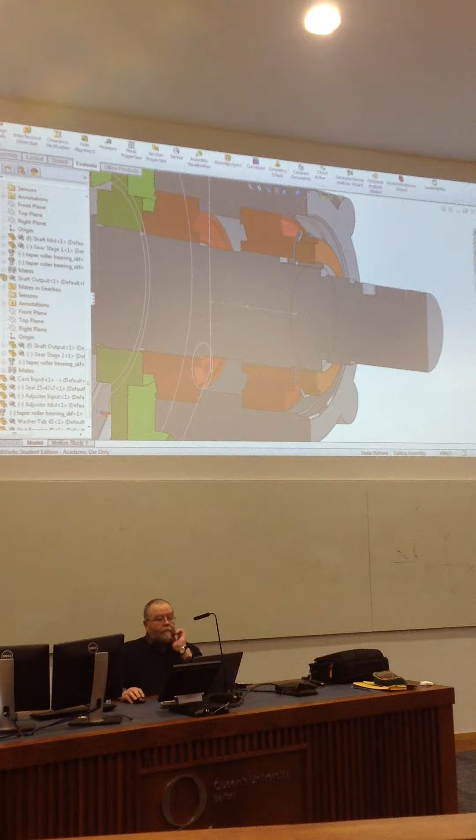This is where we left the model last week, and what I was going to do next was turn the mouse on. Right, at the moment on our shaft we have a slot cut here for the tab washer, and then we have a couple of diameters here and then a slot for the keyway.

And we need to seal this area, so we need the shaft to be able to rotate but still be sealed. Now the trouble with the slot is that it reduces the diameter available that you can use to seal on. So you don't get a very adequate shoulder to butt the drive hub up against. So the way we can overcome that problem is to put a collar on the shaft, which we seal to the shaft and provides a bigger diameter and can butt up against the end of the thread. So you get back that sort of reduced diameter caused by the keyway.

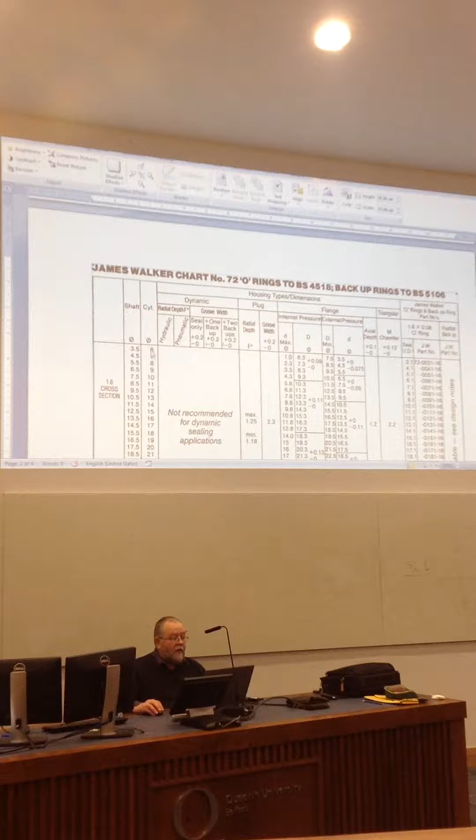So that's basically it. So what we have to do is we had our diameter for the lock nut, and we have our diameter for the shaft where the keyway is. You get all of that from your design calculations. The diameter here in between needs to be slightly bigger than this and needs to be suitable for an O-ring to go up against. So if I open up, this is a table of O-ring sizes, and our situation is that we're going to put the O-ring onto the outside diameter of a shaft. So we just look down here for a suitable size.

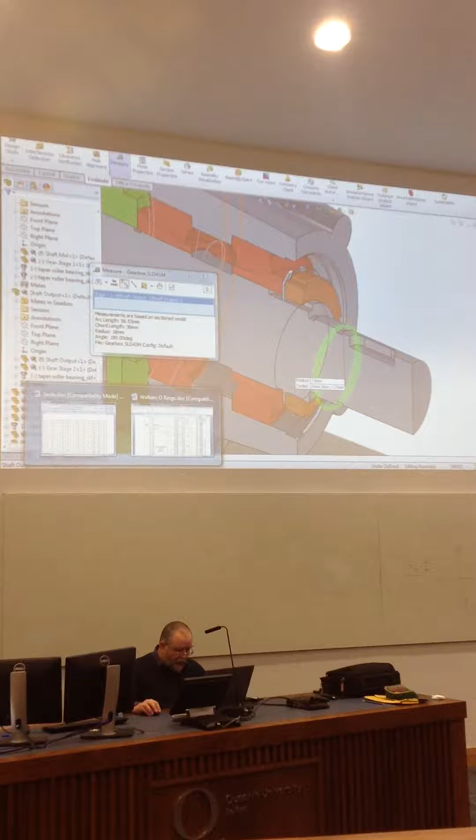Let's see, what is it at the moment? If I measure that, take that diameter there. So the diameter there is 36. So if you use a 2.4 cross-section O-ring, this is in the tables in your notes, it's on page 6.14. So 2.4 cross-section, and we're looking for a diameter of around 35, 36. Well, there happens to be one at 36, so that's fine, we'll use that. If you can't get one that suits you exactly, don't worry too much. They are elastomeric at the end of the day, so you can stretch them slightly. If possible, use a standard size, but if not, you just have to stretch it a tiny bit, that's okay.

So we're going to put a collar on the shaft, and we need to put a slot inside the collar for the O-ring to fit, and the dimensions for that are given here. It has a width of 3.1 millimeters and a radial depth of between 1.97 and 1.84. So let's have a look. I think I've got a model here open already of a collar. So there you go, it's just a simple rectangular shape. The internal diameter is 36, and then I have my groove in the middle, 3.1 wide by 1.9 radial depth. And you need some material around it to form the outside diameter of the collar.

And what you have to do is choose a size that will match a typical radial lip seal, like we did the other week. We created a radial lip seal. So if I have a look in the tables there, I've got it as 50 at the moment, and I think 50 is probably quite a good size. You want a sensible amount of thickness without it being mad. So here was our table for seal sizes. This is lip seal sizes. That's on page 8.10. And I have a choice of 45 or 50, basically, or 55. Well, I think 50 looked okay. And I'm going to have to choose a seal to go onto a 50 diameter. So we'll make that, say, this one in the middle, 72 by 8. So that will be my seal.

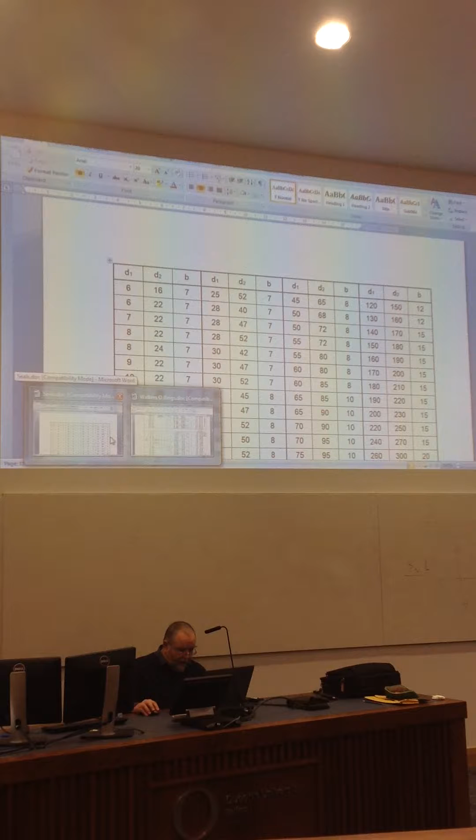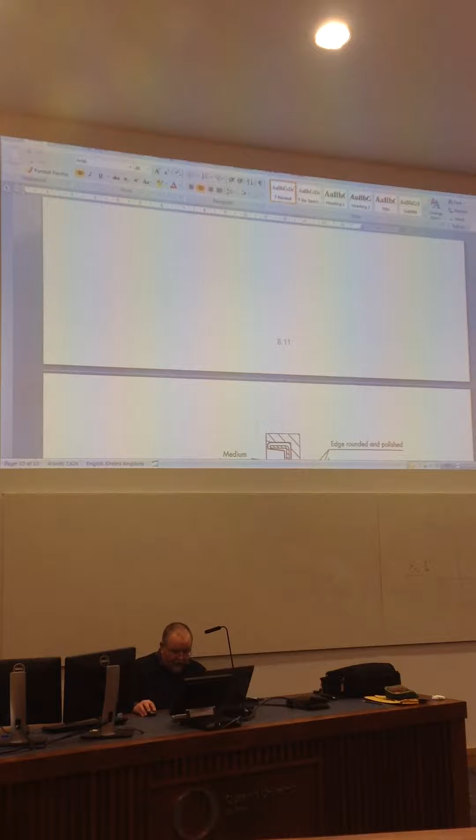And then we add on the chamfers on the two ends, and you get the dimensions for the chamfers again from the tables here. So there was the basic seal sizes, and these are the dimensions on page, what would that be, 11, give the dimensions for the lead on for the seal. So you'll see here that for a 50 diameter it says minus 3.5 to give this diameter, so that's a radial depth of 1.75 and an angle of between 15 and 30, so we'll say that it's 20.

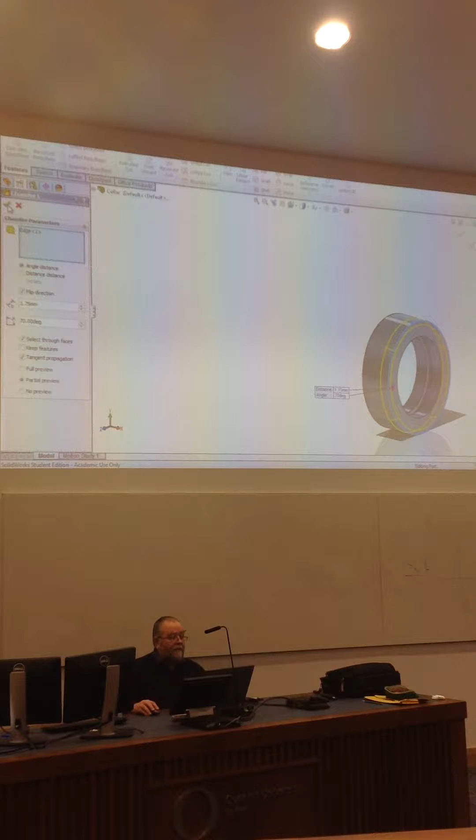So if I have a look at the model here, the chamfer details, if I do look at that, it's got a 1.75 radial depth, and you have to put in the complementary angle in this instance, so it's 70 rather than 20, and that produces one chamfer, and then of course you have to do the other one, like so, and you can also put a little small chamfer on those corners in there, and finally you can round these corners as it suggests that you do in the notes. So that's the collar.

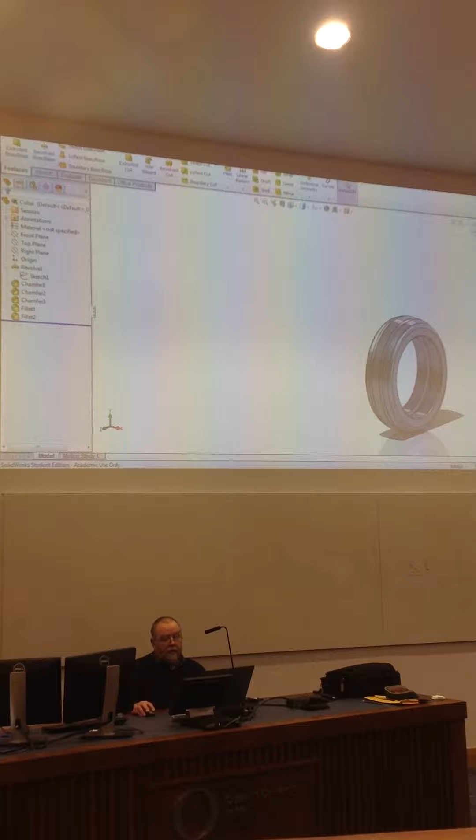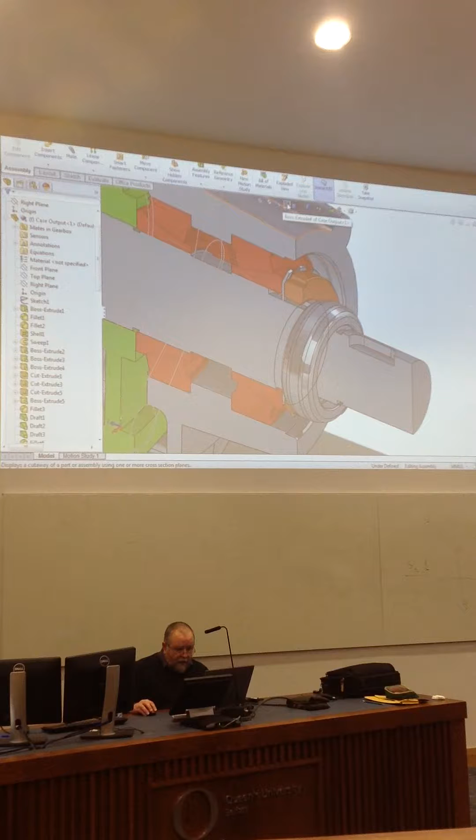Right, let's put that on the shaft. So we'll do assembly, insert component, browse, and I'll call it collar. Just dump it over there, and we'll have to turn on and off the section. And to get that mated, what we'll do is we'll just do the end face here up against the shoulder on the shaft. So that's got that one. And then the internal diameter here with this diameter here. Okay? And if I turn on and off my section now, we'll get that sectioned as well.

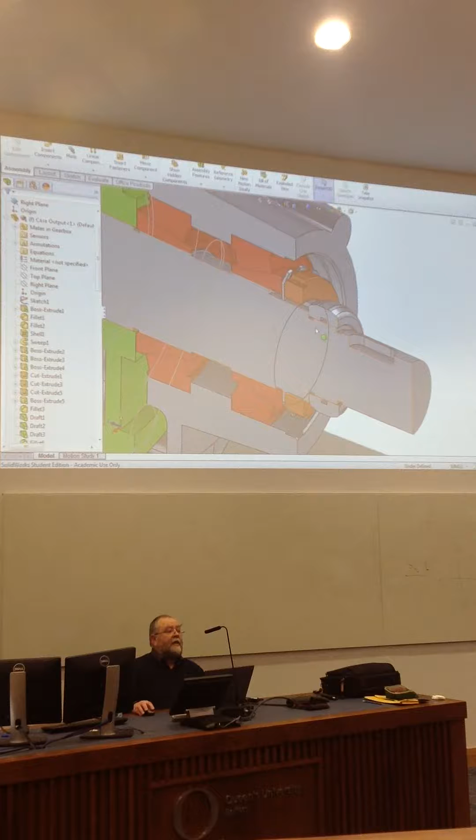Now, you'll see here there's a space for the O-ring, and we'll do that probably next week, the O-ring. I want to get the main things done today. Also on the shaft, you should have a little lead on the shaft so that the O-ring doesn't get nicked when you assemble it. Okay? But basically that's what I want to do.

So the problem I have now is that I need my seal to run on the outside diameter of this collar, and there isn't anything here that I can put the seal into. So what we're going to have to do is create a housing to carry the seal, and I'm going to start that off today. I don't know if I'll finish it. What I'm going to do to line it up is I'm going to use this diameter here, so we'll just check to make sure we know what size that is. So evaluate, measure, and that diameter there, and that's 82 diameter. Okay? So we'll create a seal housing.

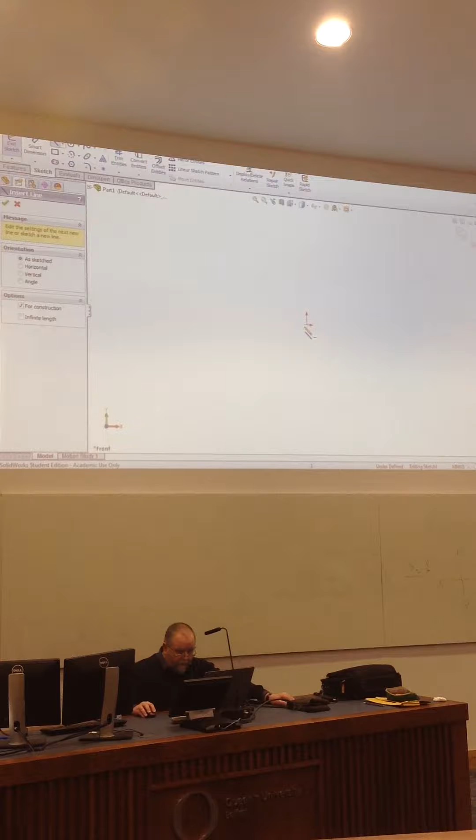And so new part. I think this is shown in your sketches, but well, we'll have a go anyway. So sketch, front plane, we'll put on an axis to start with. And then we'll start to draw in a basic shape. So I have no idea what I'm doing here, by the way, but we'll have a go at it anyway. So actually, I am lying. I do have an idea what I'm doing, but I'm just going to generate a shape that is going to look a bit random to start with. It is essentially going to have the components that I need.

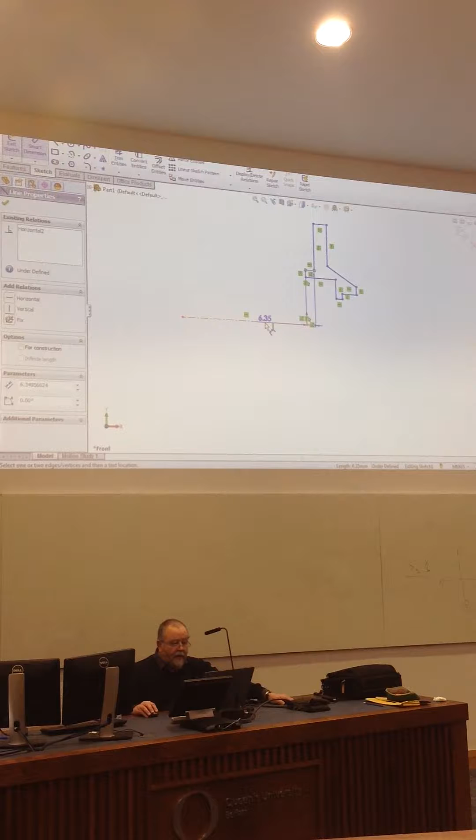Okay, so this little bit here, this is going to be a revolved part. This little bit here is going to be the spigot that goes into that recess in the case, and this bit here is going to be the bit that carries the seal. Okay, so we need to put on some dimensions. The first thing I'm going to do is put on an alignment to align this point here with this point here, that way we'll have a starting point. So, we'll put on this diameter here, I suppose, is the first thing to go on, because we know that dimension, I just measured it. That was going to be 82. Okay.

Now, the length of that spigot, I'm going to have a chamfer on the end of here, and there'll be a chamfer on the end of the case. So each of those is going to be 1 millimetre, so that's 2 millimetres gone. So I need at least another 2 millimetres of length to allow an adequate spigot. So we'll put on that as a dimension. So we'll put that on as 4. So 2 plus 2 is 4. What else can we do? I suppose the thickness of this spigot we could set at this point. It doesn't need to be very much. I'm going to put on 3 there. That will be adequate for that.

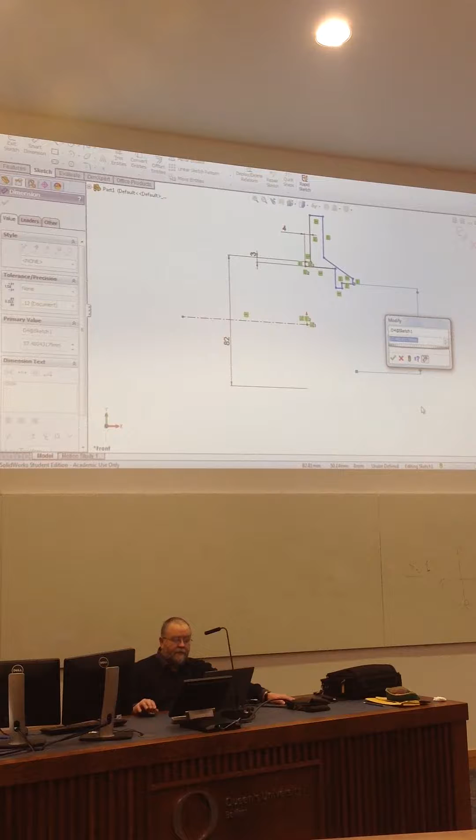Let's put on a diameter for this, because this is going to be the diameter of the seal. Okay, so axis up to here. And if you remember, when I was selecting the seal, I chose a diameter of 72. So 72. Now that's partially turned this inside out. We'll fix that. What we'll do is we turn that off, and we just grab this line here and move it up there. Until it has a dimension on it, it's not going to move the way we want it to. Okay, so I think that was right, wasn't it? 72?

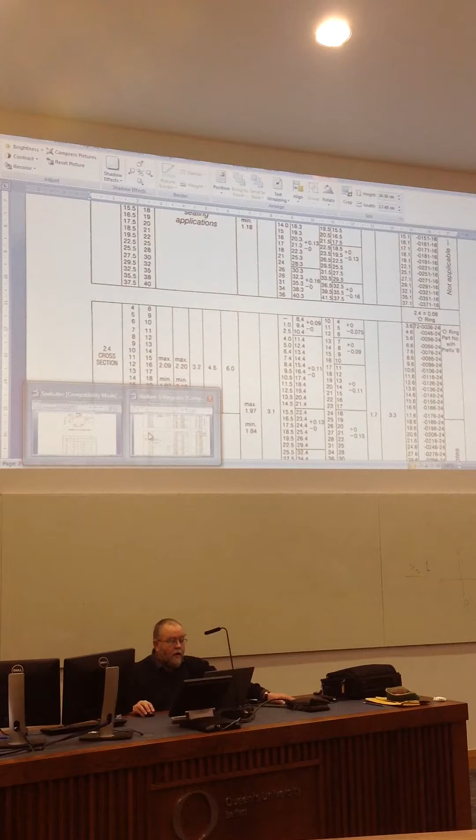50, 72, yep. Okay. Right, now, this little bit here is providing a shoulder for the seal to press up against. So that only needs to have a radial depth of about 2.

When you put things on sketches, you don't always dimension it the way you would on a part drawing. I mean, this would be considered bad practice, dimensioning things as radial depths. But on a sketch, it's very useful, because it means if I change that diameter, that will move with it. Okay.

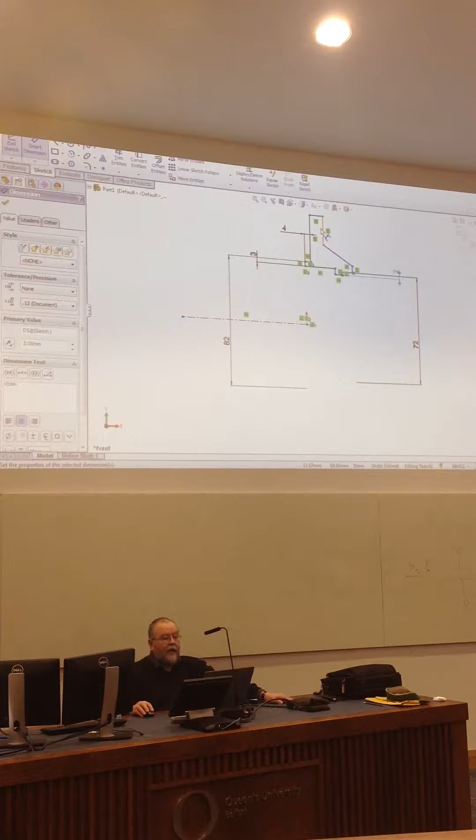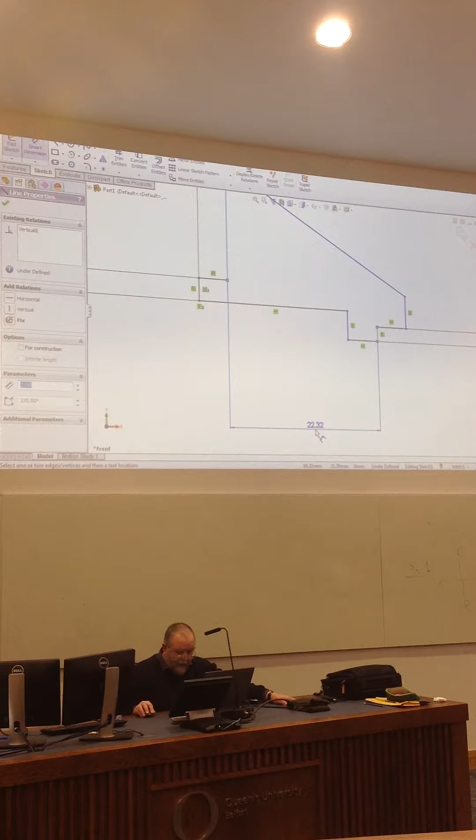Right, this is going to be a flange, so I think 6 millimetres thick for that will do nicely. So 6. Right, what else? I'll zoom in here a little bit. Okay. I suppose we should put on a dimension from here up to here, which is where the seal will be, because that's going to be the thing we use to position things.

So I just have to totally guess at the moment, okay? So I don't know. I'm going to put in 17. I have no idea whether that's right. Let's turn that inside out. Drag that over there, and to stop it turning inside out again, I'll put on a dimension from here to here, and it can be quite thin, this bit. 2 millimetres will do nicely.

I suppose I could put on a dimension from this line to this point. Now you have to dimension to a point because it's over at an angle, and that can be quite small as well, I think. So 2, and I'll then set on an angle on here. I've nearly got everything pinned down now, so an angle from here onto here, I suppose, will do nicely. And I don't know, let's try 20, see what that looks like. Yeah, might even get away with 15. You'll see what that's about in a while.

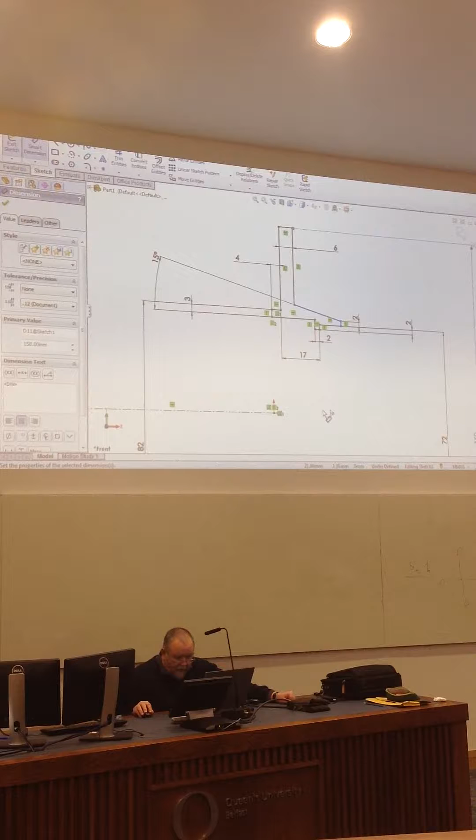The only thing I haven't pinned down is this diameter here. Quite honestly, it doesn't actually matter because we're going to trim the outside, but I'll put on a dimension anyway just so that I can say everything is constrained. So we'll go up to there, and I don't know, 150. It's just a big diameter basically. I can see a dimension that's not set. I haven't positioned this end point.

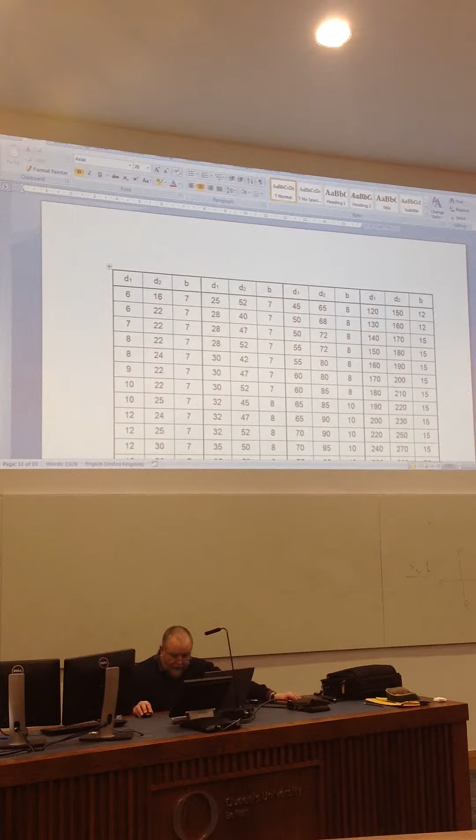Well, my seal was 8 thick, and if I look in the notes, it says that for an 8mm seal, right, B2 needs to be 8.3. I'm going to make it 8.5, so it's slightly longer than it needs to be. So we'll just dimension from here. Whoops. Okay. So that's everything dimensioned there.

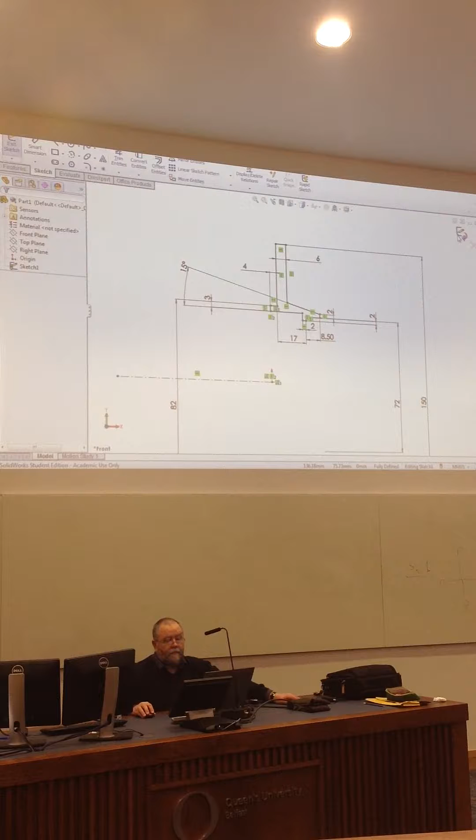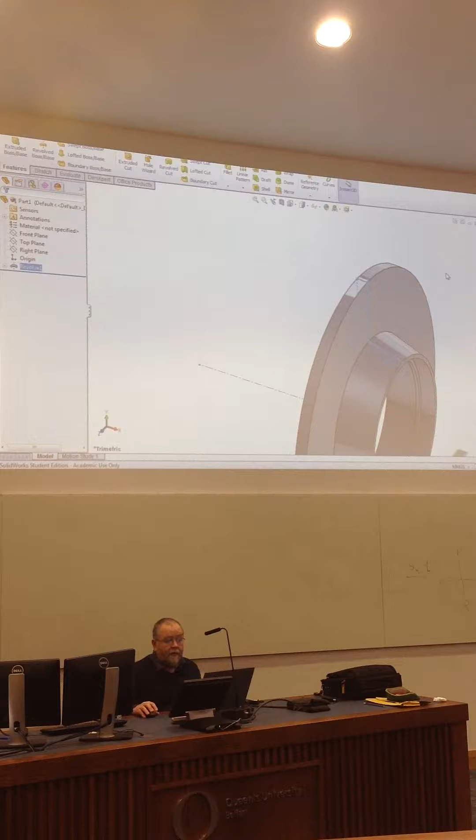Right. So we'll exit that. And I've left that selected, so if I do revolved feature, it will instantly produce that part. And we can now put this into the assembly and see whether it's anything close to being the right sort of size and shape. So we'll save that file, save, and we'll call that housing seal.

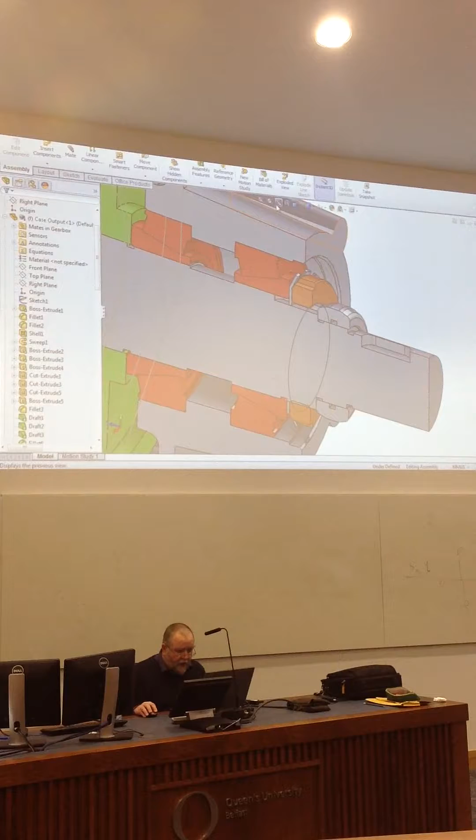Then I can shut that down, and then we can install it in our model. So, assembly, insert component, browse, housing seal, there it is. Drop that over there. I have to turn the section on and off as usual. Okay, now, what we'll do is we'll make this face level with this one. So mate this face here and this face there, and it's done it the right way around, so that's good.

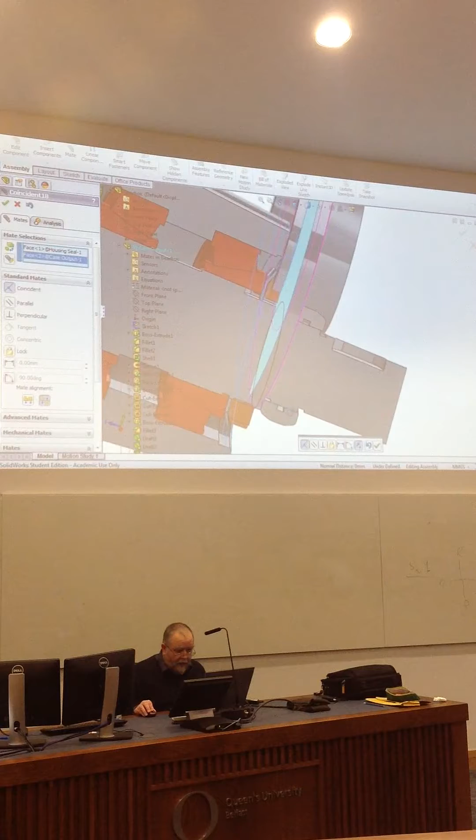So we like that, and then we get the spigot here, and we align that up with that diameter there. Okay, now I'm going to turn my section on and off again. Now there will be more constraints that have to come in yet, but we'll not worry about those for the moment. Okay, now then, what I wanted to see, and we'll true this up, is I wanted to see where the seal will end up.

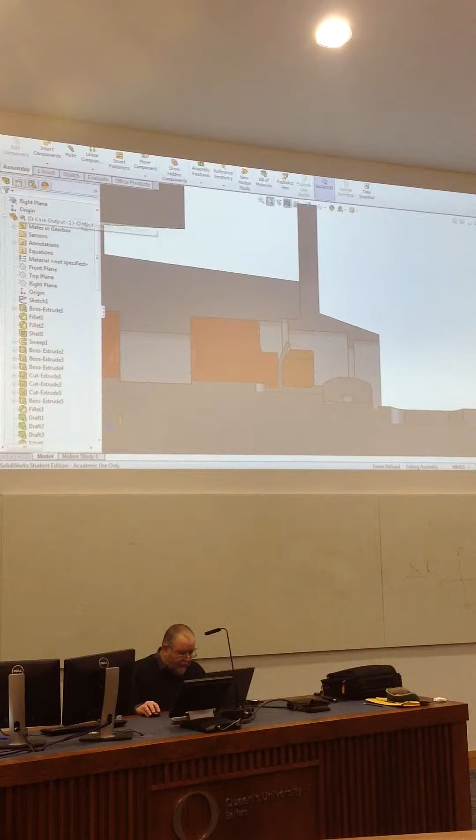And at the moment the seal is going to end up in the wrong place, okay? So I need this to move over by a reasonable margin. And I think possibly the easiest way to do that is to edit it in place. So if we do edit part, and it's basically this sketch here we need to edit. Okay, so we'll be able to see what happens. So this dimension here is the key one.

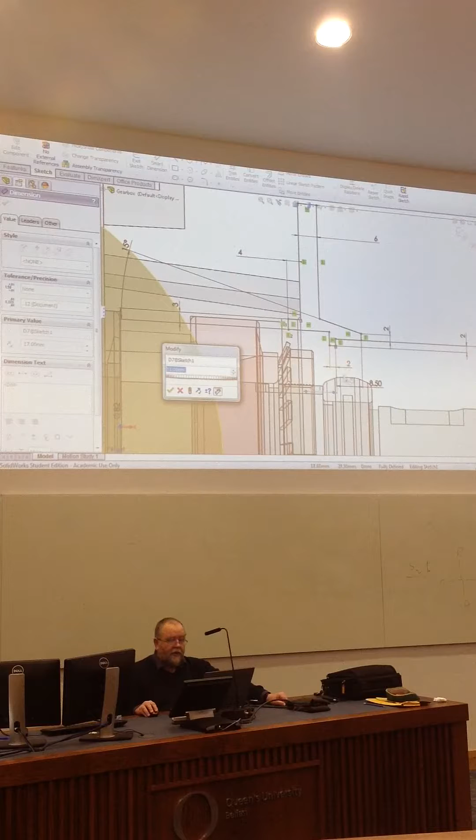And essentially, we'll just bring it over until the seal would run roughly in the middle of this thing. So you'll see it's fairly much going to run in the middle. It could go 10 or 11, probably it would work. I'll tell you what, I'll make it 11, so I'm going to push it out slightly because the seal is actually over to one side anyway. Okay, so we've got that.

Right then, so finish that. And finish that. So that's down in the right sort of place. There are all sorts of chamfers and all sorts of things to go on this yet. But what I'm going to do is I'm going to assemble my seal. And I've already created a seal, so we'll put that in.

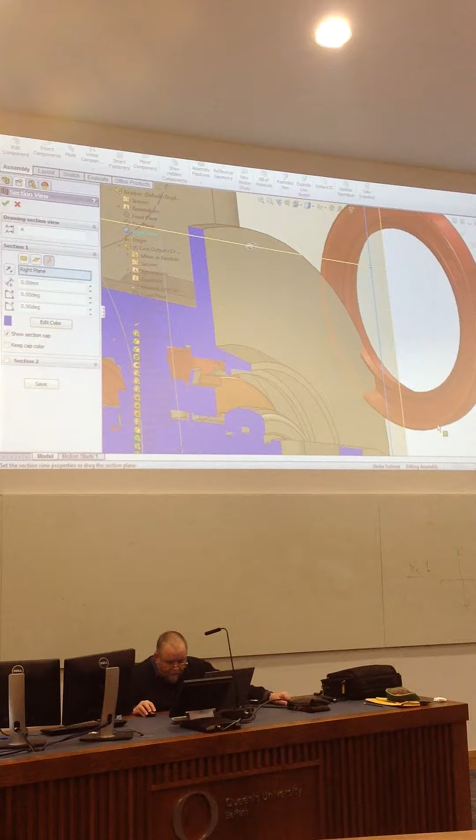So browse, seals. There it is, 50 by 72 by 8. Just put that down there. On and off with a section. Now, the first thing to do will be to get this end face butted up onto this lip here. So you have to zoom in right in for this because there's so little surface to actually see. Actually, I'll say catch that, I think, so maybe I don't. So we'll do that. And mate, not been quite so helpful when we're zooming on this.

Okay, so the lip of the seal is running on the outside diameter there. You can see now that if you put a drive hub on here, that's going to butt up against that collar. Let me just zoom in right into this detail here.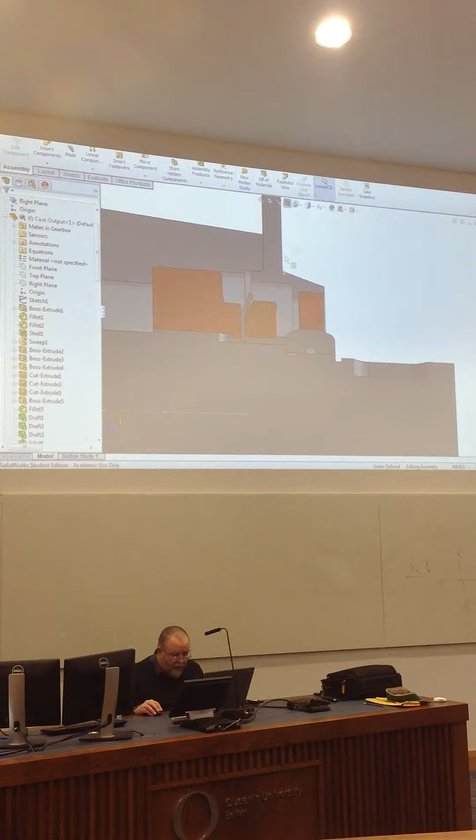Now, there's a couple of things you need to note about this collar. It must protrude beyond the end of the step on the shaft, because otherwise when you put on a drive hub there's a danger that it won't clamp up against the collar. So you want the collar to be trapped by whatever drive hub you're putting on. So the end of the shaft here where the shoulder is must be inside the line of that.

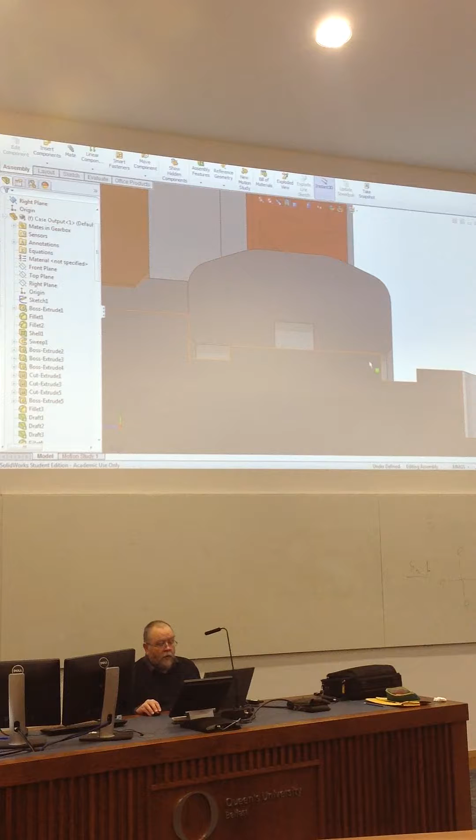And the other thing is that the end of this collar must be outside the line of the seal housing, because otherwise there's a danger that when you clamp on a drive hub you end up clamping up against the seal housing. So we will have to put a lead on here and we will have to put an O-ring in here, but for the moment I want to move on to some other things. Okay, right, well, that was quite good, so we'll just save that just so we've backed it up.

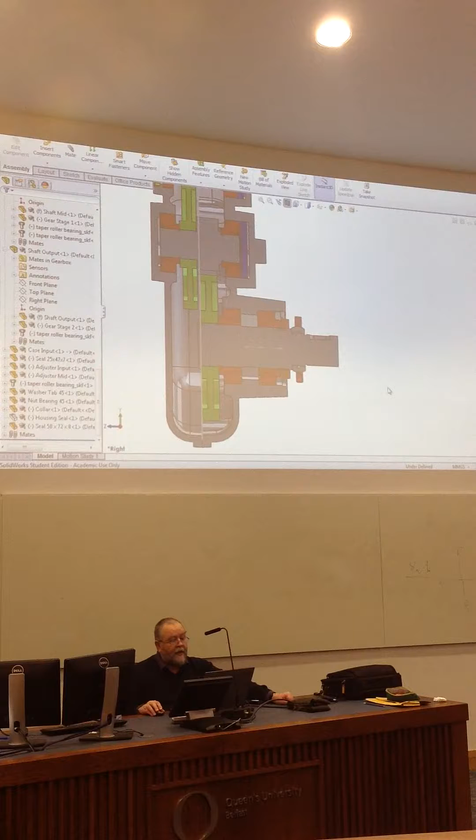Right then, the next thing I want to do is, and I'm sort of going to ignore this thing, in fact, just to make life easy, I'm going to actually hide it. Housing seal, just hide component. It's going to sort of get in the way a little bit for the next step. The gearbox that you looked at in the artifact study had a ring going around the outside of the output shaft to enable you to mount the thing. So I thought we would do something similar. So that's what I'm going to do next.

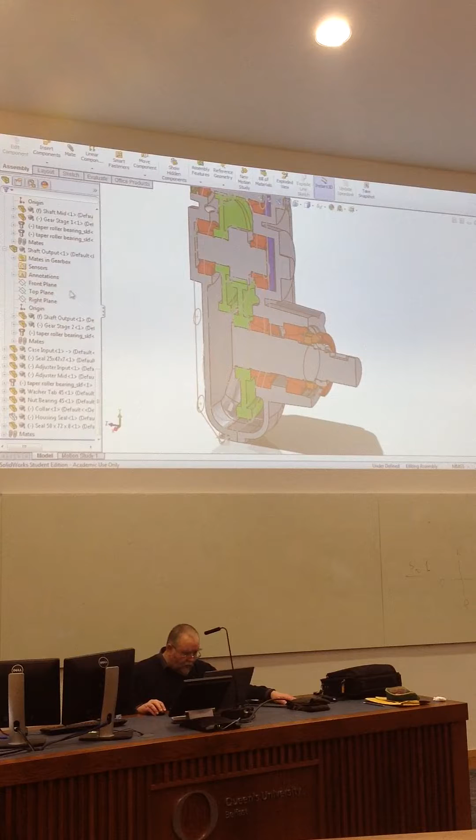So we'll open up this case. So I'm going to be working quite a lot on the output case here. Right, so we have to go back up the top and we'll open that up. Okay, so we're going to put a ring going around this, and it doesn't really matter too much what surface you select. I'll probably do it off this reference surface. So let's have a look. Feature, extruded boss. And we'll select our reference plane, so front plane there.

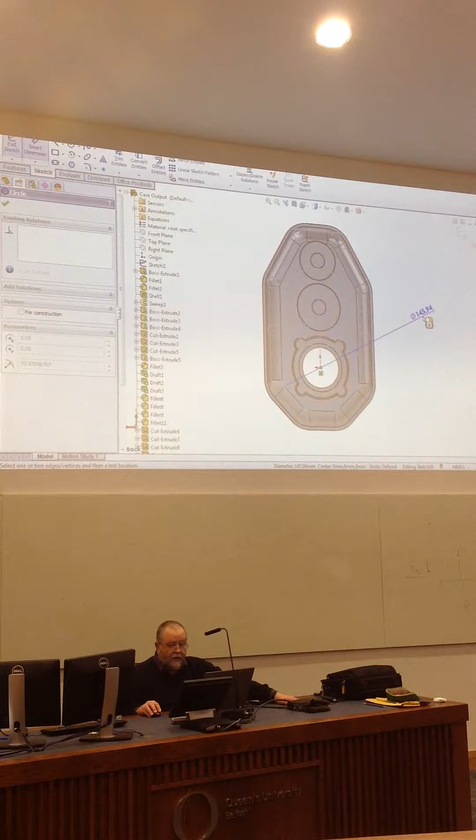And I'm just going to draw a circle basically. Well, what I'll do is I'll go plane on so I can see what I'm doing. Okay, I want to see the outside of the case, and all I'm going to do is draw a big circle. So it's going to be outside of that ring of bosses, and this will vary so much depending on how much space you've got. And sometimes it forces you into making all sorts of changes, but anyway. We're just sticking a size at the moment.

There's two ways of doing this. This is the inside diameter I'm doing here. Either you can make sure that this has an adequate gap at the bottom for putting in fillets around these bosses, or you can put it in tight and then you have to do a face fillet between the two surfaces. Now I don't think I've got room to push this ring as far out as I'd like to, so I will have to put in a face fillet, so that's what I'm going to do.

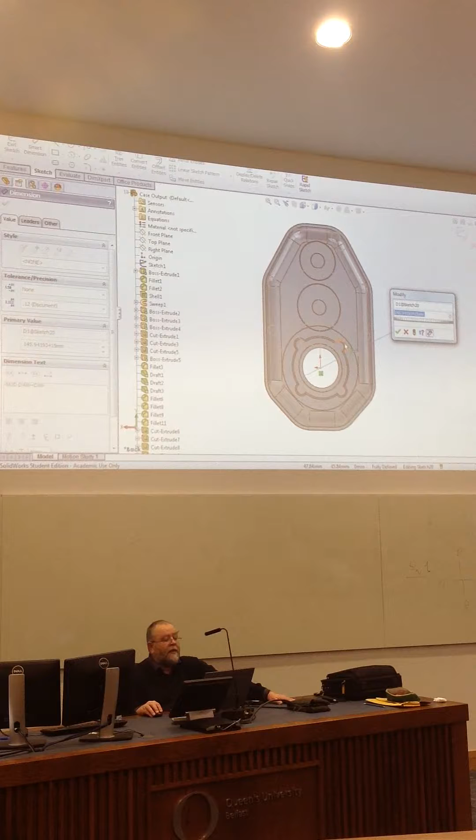So we'll put in a value, I don't know, let's try 145. Okay, and I'm then going to do an offset from this of, let's say 10.

Actually 9 will be enough. Okay, so that's offset that. And by doing an offset, it means if I change this diameter, the two rings will move together. So that's why I've used an offset rather than a diameter. So I need to get bosses in outside of this, so that's why I'm looking at this basic shape now to see if I think I've got room, and I think I have. So I'm happy enough to leave it like that.

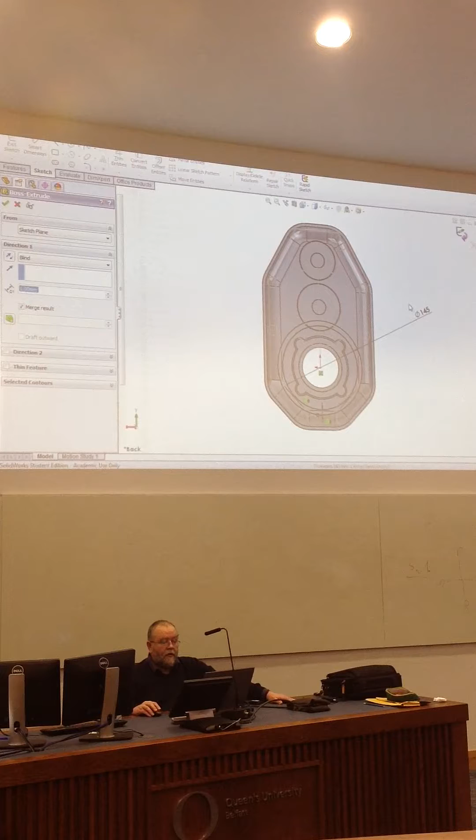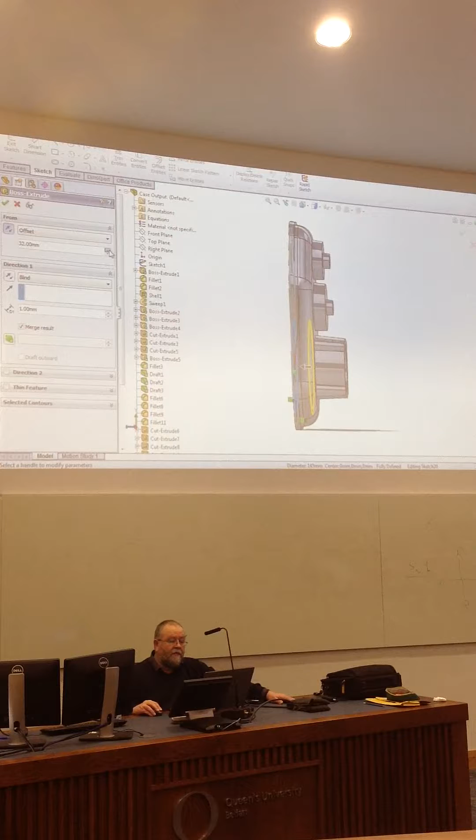So what we've got to do now is protrude this. Okay, now I started off by drawing this on this plane here. It's clearly not where I want, so we're going to do an offset plane, and essentially what I'm going to do is offset it, it's going the wrong way there, offset it so it goes right outside of this thing. I say right outside. What I need, it's going to be around there, okay? So let's screw this up and we can have a look at this. It has to be higher than these two bosses here, okay?

You need to have probably around 6mm or so higher than those bosses, and ideally it should be less than the height of this boss. I say ideally, you can certainly have it level if that's necessary, and I have on occasion seen it where people have actually done it that this one is inside, slightly lower down, but I wasn't planning to show that. So let's have a look. Let's make it 90 as a nice round number. So that's got that there.

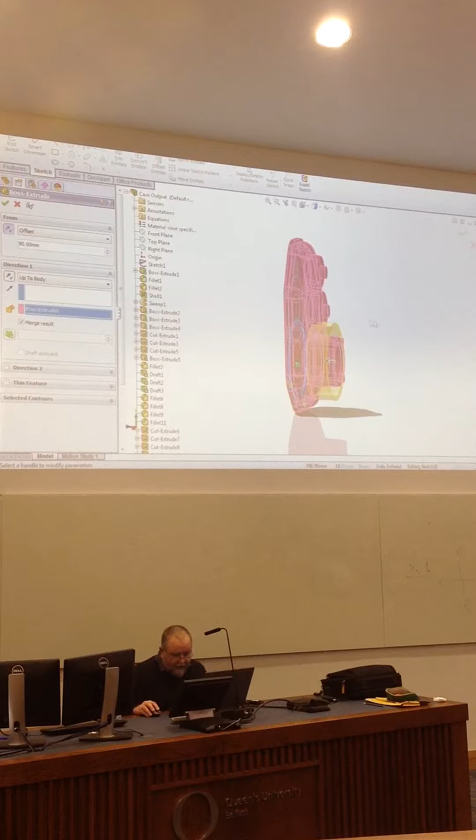Then I want to extrude this inwards as up to body. So we'll select this body, and at the moment it's trying to do it outwards. We need to change the direction. So there's the ring coming in there that we're going to have on this, and I've done it by protruding outwards going in because of the sort of curvature of the edge of the case. If I'd taken it from this surface and gone outwards, I would have ended up with a tiny little gap under here where the corners are rounded off.

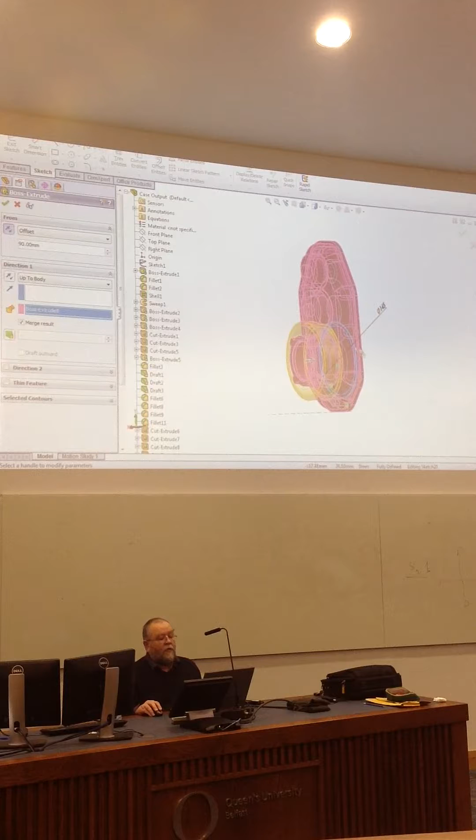By doing it as a protrusion going inwards, you'll see this is a principle I use all the time. It always fills in those little gaps and makes a much better model. Okay, you're taking a real big risk if you take that surface and come outwards. Well, the other thing is you'll end up probably with some of this boss protruding inside your bearing boss. So, right, so that's the basic shape.

Now I do want some draft on it. So I want a 3 degree draft, and looking at that, it's a lot narrower at the bottom than it is at the top, so it's clearly the wrong way. So we'll click that to draft outwards. And yeah, that looks alright. So we'll do that. Okay, so that's got my basic ring mounted on there. Okay, now then, if we're going to bolt this to something, we're going to need some bosses.

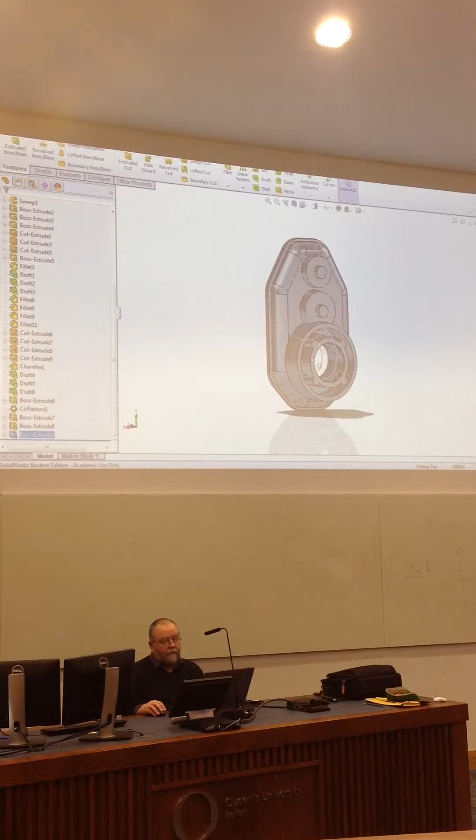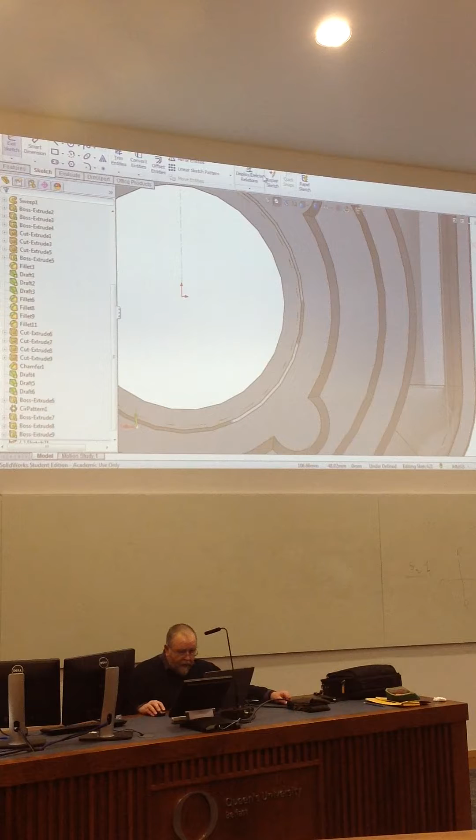So what we should do is we'll do extruded boss, and I'm going to select this surface because it's basically going to be level with it, and like so, and we'll just zoom in here, and I want to use M10 bolts to bolt this to whatever else it's going to be bolted to, so a little bit heavier than the bolts holding the thing together. So I use my rule of thumb of doubling the diameter and adding on 2, so that will make that 22 diameter. So we'll just draw on a circle here,

and I'm just guessing totally where that is at the moment. Right, the first thing is I need to make it level with the axis, so add relationship, so there onto there, and make that horizontally aligned. I said I wanted 22 diameter, so we'll put on here 22. Now, this is the ring here, and I need this to be positioned a little way out from here, so let me just grab that for the moment and just drag it if I can. Yeah. No, I'll have to do it with dimensions.

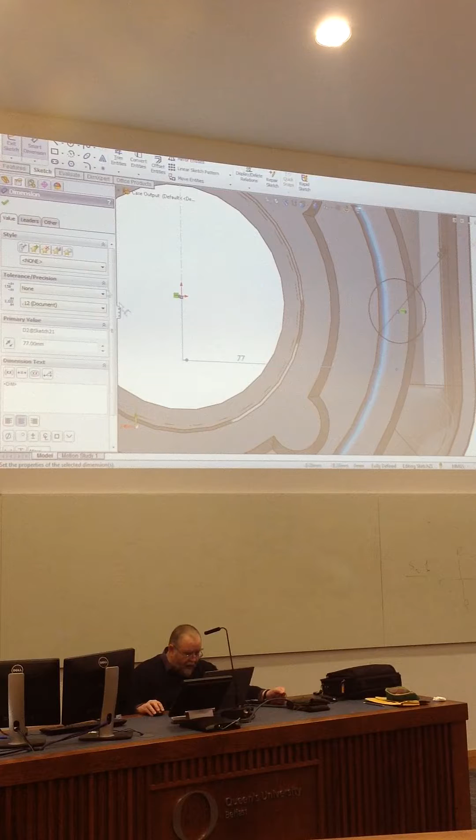Okay, let's put on a dimension from the centre of this to this ring here. And it's gone to the centre, I don't mind that. That's what it does by default. You have to sort of enter it, and then you can edit it by changing the leaders. Change that to minimum, and now it dimensions from that edge there. Okay, you have to do that, and then you can edit it. So, let's see. We'll start off with 5, and then we'll increment it. So,

now I need the boss to be reasonably... If you can imagine, I'm going to put a spigot on this thing, and I want the full circle to be outside of the spigot. And the spigot is going to take 2 or 3 millimetres here, so I want this to be well outside of the ring. Okay? And then what I'm going to do is put on a little straight bit here so that it doesn't end up being undercut. Okay, so we'll do that.

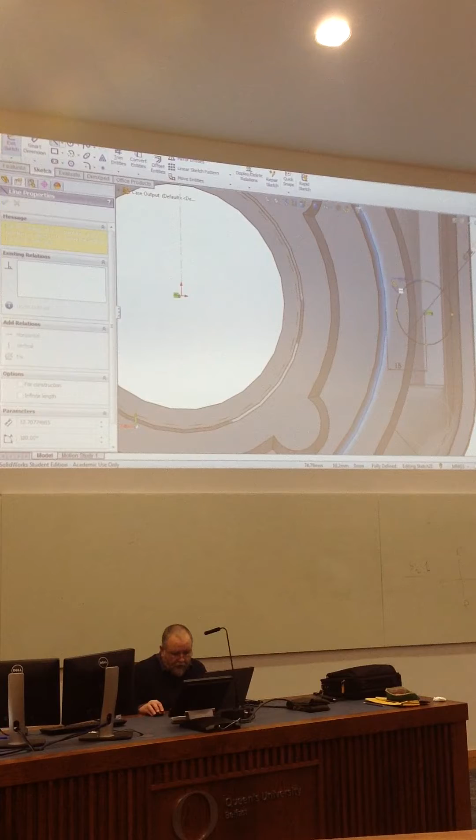And we'll just click on there to get a tangential line. Make sure it's horizontal. Drop that down to there. And I don't know if you can see a little blue chain dot line that's lined up at the bottom edge, so that's what I wanted. And then that onto there like so. And what we'll have to do is put on a dimension from the centre of this to there. And we'll make that 15, say.

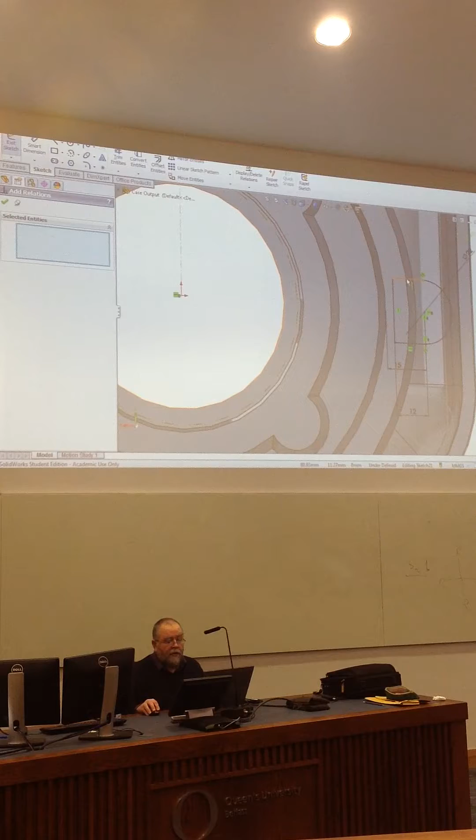And then I'll trim out the bit of the circle I don't want. And it's left that line as blue, and I know why. If you look, this has a horizontal alignment on it, and this has a vertical. That one, somehow I managed to miss getting a horizontal alignment, so we'll have to add in a relationship there, so they're horizontal, and I should be happy now.

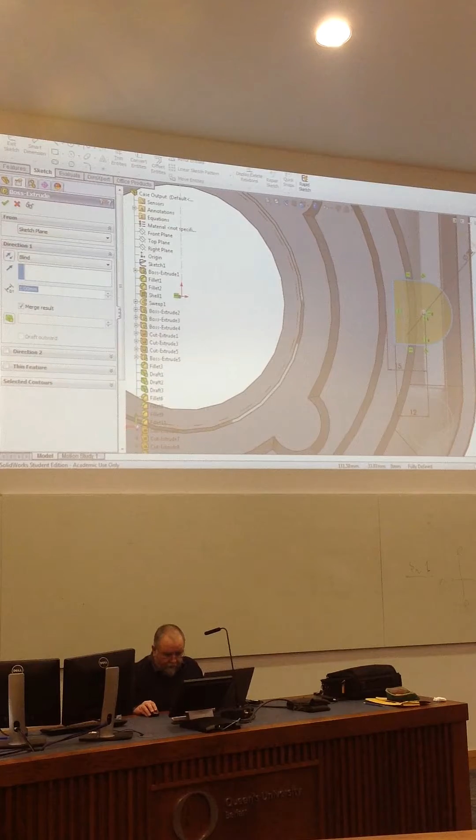Okay, so that's got me my sort of D-shaped boss, and there should be plenty of room for getting a fastener in there and so forth. Okay, so we close the sketch, and now we want to do up to body. Here's the body here, and we want to add on some draft, so put on a draft there. That's gone inwards, we need to draft outwards. So that's got that on there, and it's actually run over the edge here totally, but it seems to be working, so. Okay, so that's got on one boss.

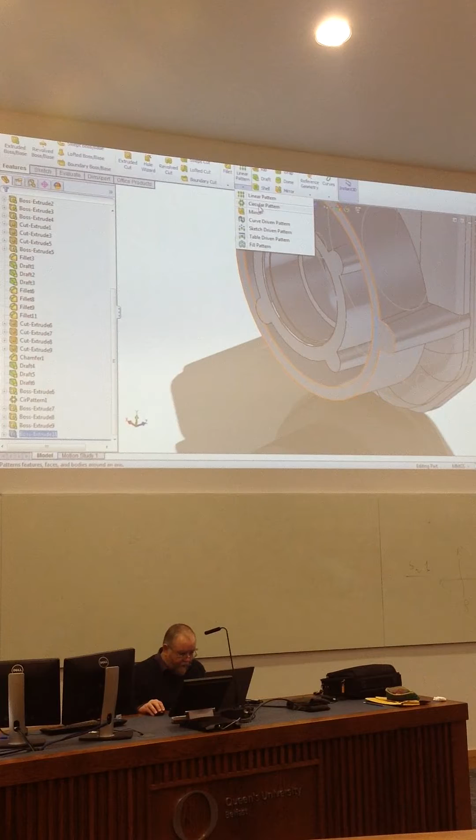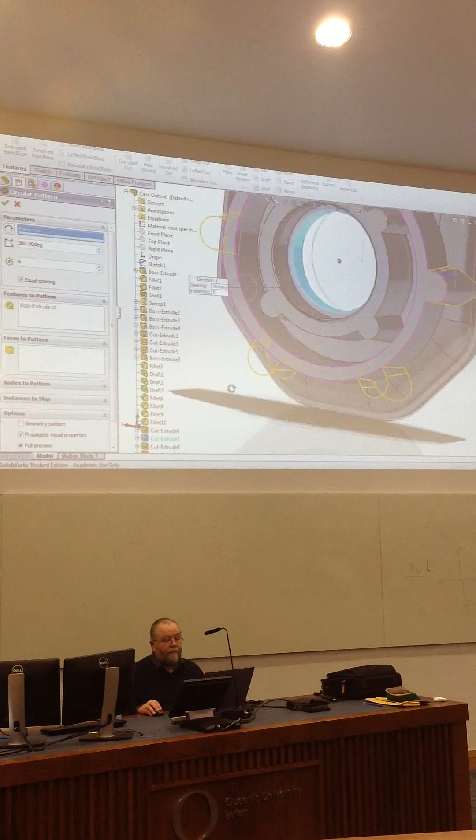Right, have enough of that. Now, what I'm going to do is see if I can get on the other bosses. And to do that, I'm going to use a pattern. So, what we should do is circular pattern. Now it knows that that's the feature that I want to use, and what it's looking for now is something to rotate this about. Now it looks usually for an axis, but it will also take a diameter. So if I select this bore here, it will select that. I want 6 bosses, so that works pretty well. So we'll do that, and there you go, it's got 6 bosses on. And they all seem to fit on there quite nicely.

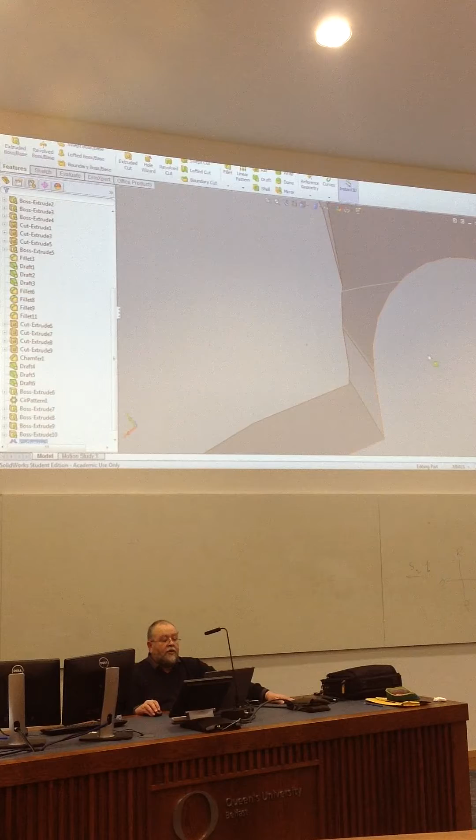Okay, let me just zoom out slightly here and then back in. It's just a little area here you need to look out for. On my particular one, the bosses just overlap that, and that's brilliant. That makes my life very easy. If you get a thin gap in there, you'll have to fill in that gap. And you can do it by using face fillets, or you can just put in a block of material before you cut out the bore on the other side. So for me it's worked very nicely, so I'm happy enough with that.

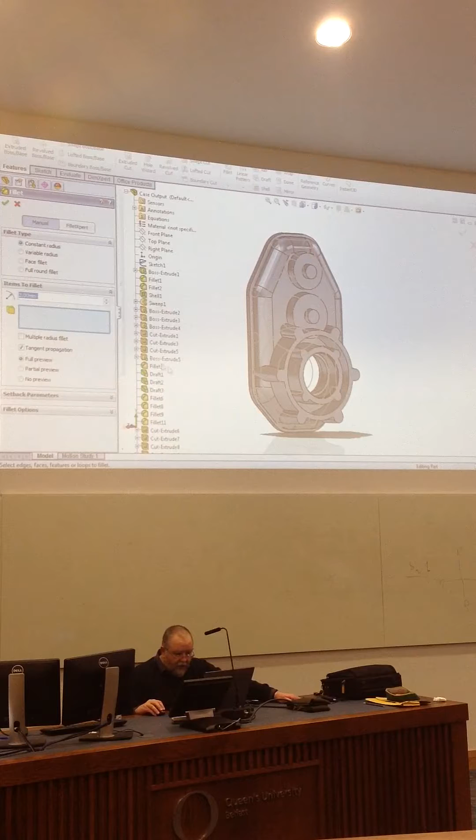Right then, so the next step. The difficult bit with all of this is filleting and putting on draft. Now, that mounting ring has draft, this has draft. I put draft on these bosses earlier, so I'm happy enough with that. The first thing I'm going to do is I'm going to round my external corners. So, fillet, put on a 2mm radius, constant radius. So it's anything on here that's an external corner, so like that, like that.

These bosses here are going to be left cast, so the ends of those can be round as well, like that. Now, have to watch out, this goes around inside here, so I need to put that on there like that. Okay. And because of putting in the face fillet, I'm going to put a radius on this corner here, because that will make sure that I can get the face fillet in. You remember, if you have a sharp corner, the face fillet comes up, sees the sharp corner, it doesn't know where to go. If you put on a radius, it can roll around. So, that's got that done.

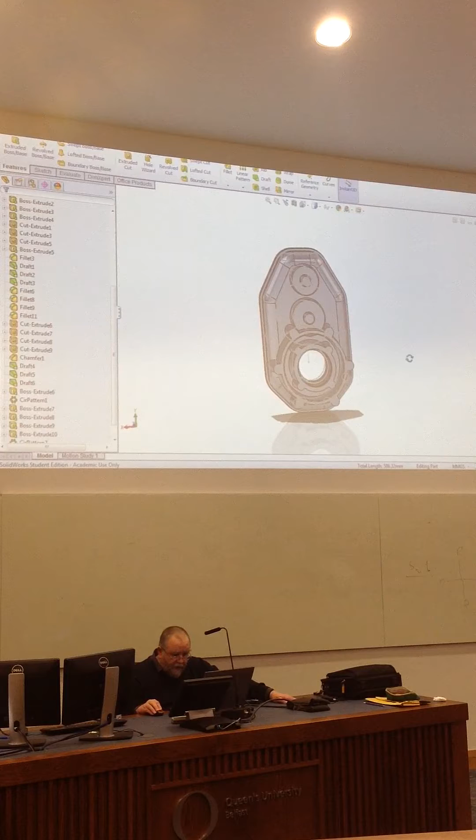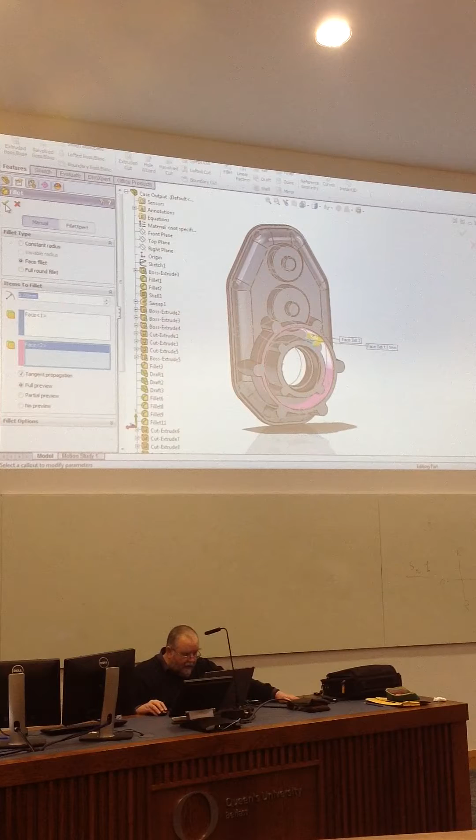Do the face fillets next actually. And in fact, I'm not sure if I need a face fillet on there or not, but we'll do these ones on these bosses anyway. So, fillet, face fillet, 5, and we select, say, that, and we have to select that, and then that, and that's gone in there, and if I just zoom in on that,

you see why I rounded that top corner? It's just rolling onto it. If I'd had a sharp corner there, it wouldn't have allowed that fillet to go around. Okay, so that's why you round it off. Sometimes you can get away with it. If the fillet's not going to extend the whole way up, you'll get away with it. But because mine does, you need to have that in. Okay, let's do the other ones. So, fillet, face fillet, so that surface there, that surface, ring, that's there, so that's good.

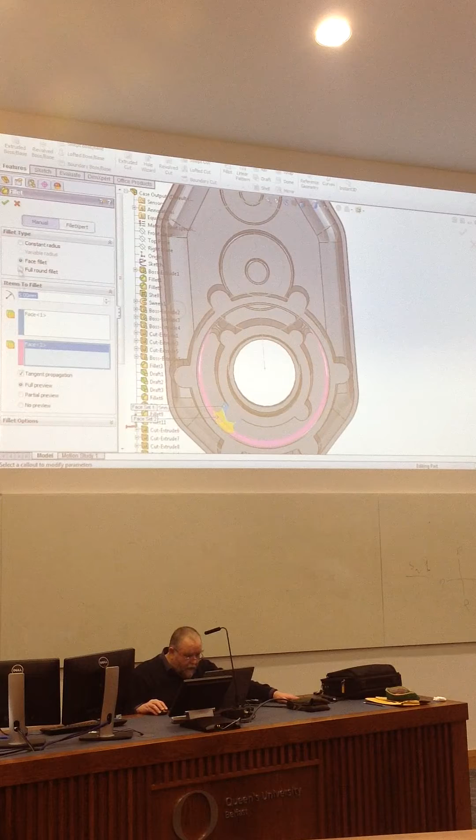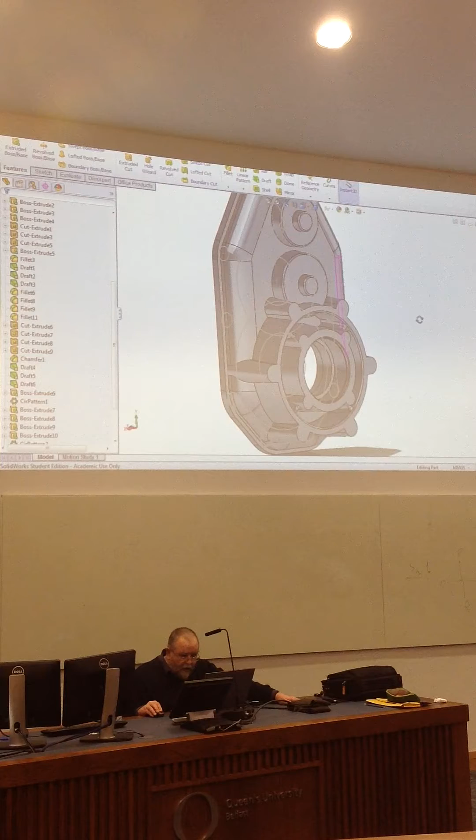Fillet, and finally, okay, so it's got all of those in there. Now, I think I'm probably going to need one in there as well. It does look rather close together, so we'll do that. Fillet, face fillet, this surface here, this surface here. Yep, certainly did need one in there. Okay.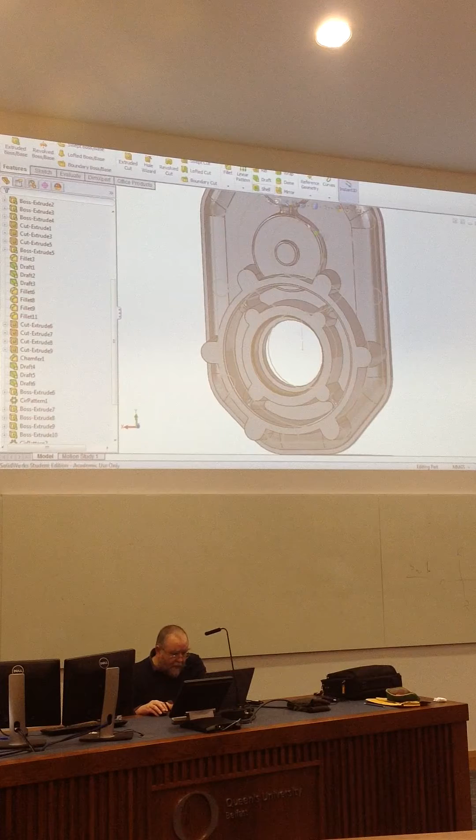Right, I'm now going to put in the fillets that are sort of perpendicular to the gasket face. Okay, so it's all these ones that go this way. The order in which you put in the fillets is terribly important. So it's very hard to explain what the actual logic is. I just find it naturally. It just comes to me, but more or less you do it in the order I'm saying. So let's have a look.

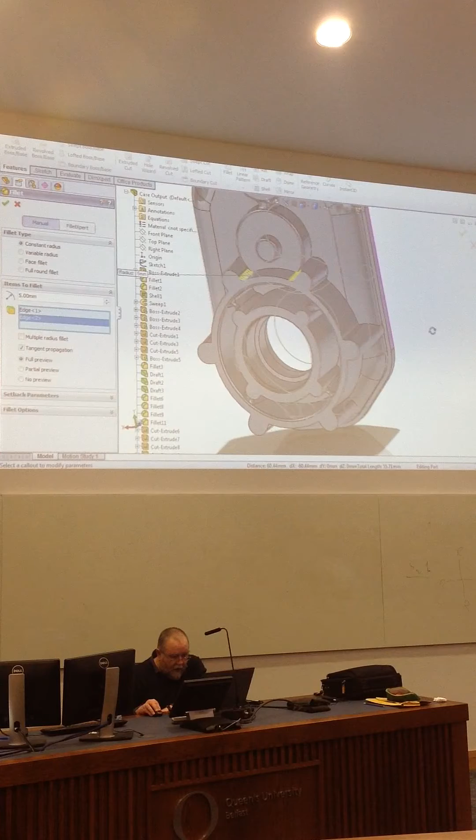Fillets, there's a lot of fillets that go in here. We'll put in these two little ones in here. Oh, wait a moment. Constant radius. And we'll put in here and here. Okay, and then we go around doing all of these.

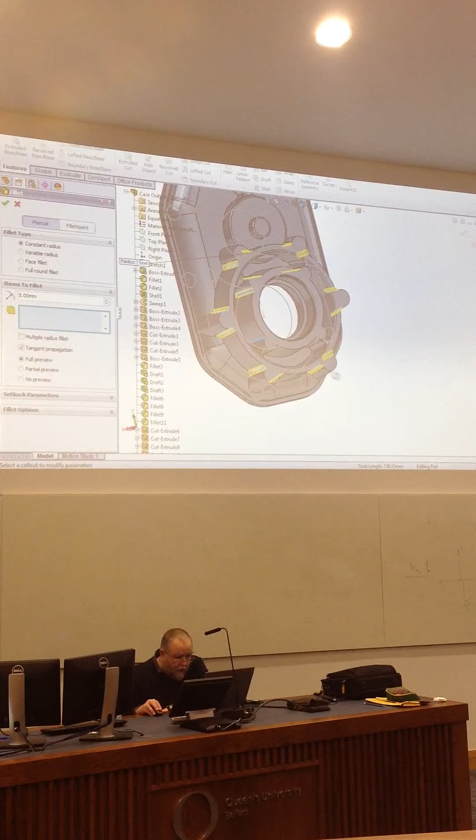So that's all those on the outside there. I haven't done here, and you'll see why in a little bit. I can do these ones inside as well. So we'll do, and if you forget one, you can always come back and add it. Just open up the feature and stick it in again. So that's got all of those in there. Okay, so we'll do that.

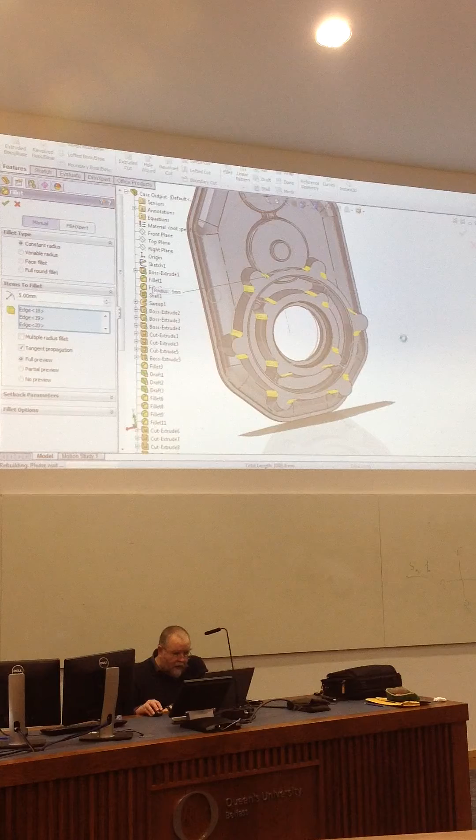And I said to you I hadn't actually added in the one on this corner here, and you'll see why now. You needed this other one to let this flow around. So if we select this now and put that in, you see how that flows right the way around and over the other side. But it won't do that until it has that vertical fillet in first. And it's a similar story in here. As you put one in it will flow around, so one in there. So we've got those two.

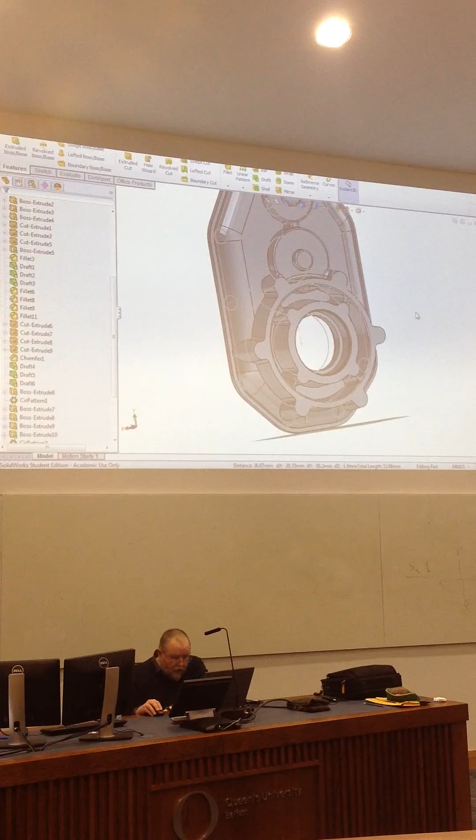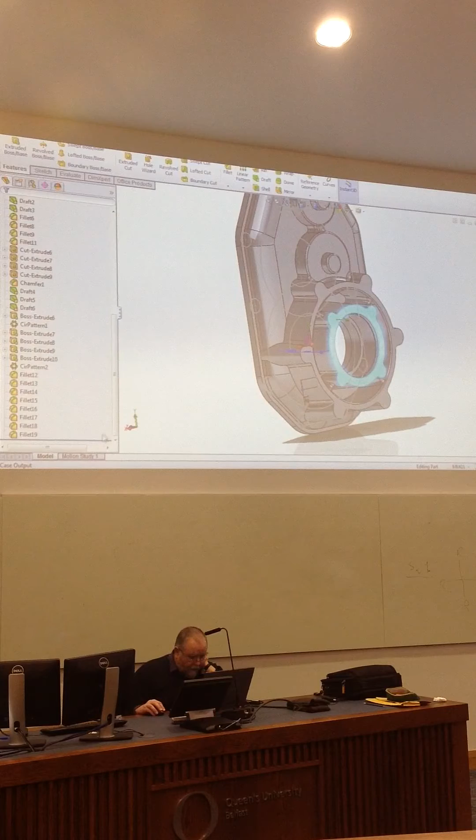Now I think that's got everything that is roughly perpendicular to the gasket face. So we could put in these other fillets. I'll tell you what I will do though. I'll put in a fillet on this lip here first, a couple of fillets. And to do that, I want to wind back before this boss. So where's that boss? That's up there. So boss 4, we'll just wind our feature tree back here. Let's have a look. That will do. I just want it before any features actually start running over it.

So there's 2 radii to put on here. I suppose I'd better zoom in here so you can see it clearly. If we just zoom in at the top there. Right, there's the external corner, and as a rule of thumb I'm using 2 for all my external corners. So constant radius, so that will run the whole way around the case. If we just put that on there.

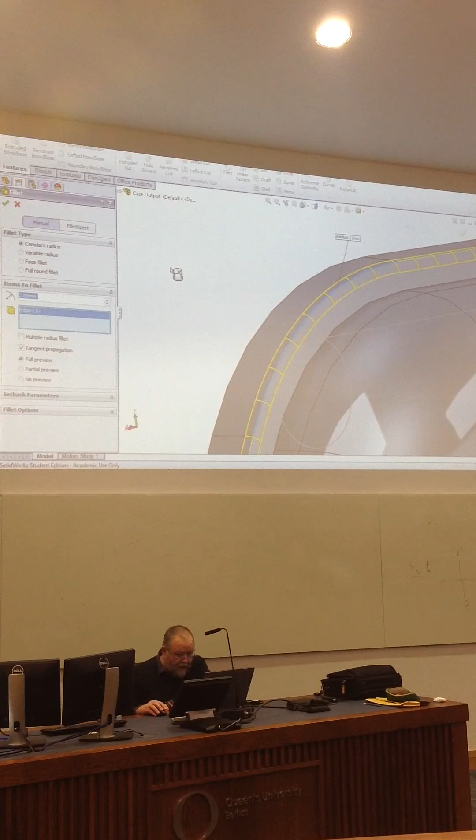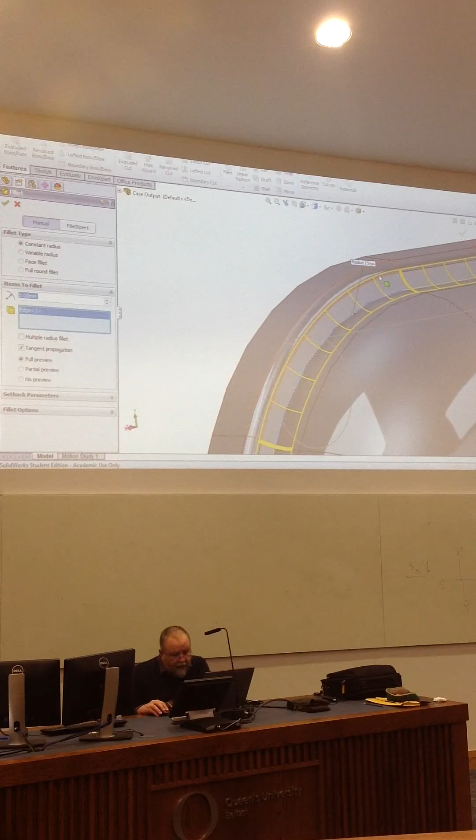Okay, and then there's my internal corner. Now I will select that corner, but it will actually run over onto that radius there. That's why I have to put on that first. So 5 for that. Select that corner there. Okay, and you see the way that that is running onto that fillet. Okay, so we can now wind our feature tree back down to where it was.

Okay, now then, I don't know why, but this next bit gives me a certain amount of satisfaction. I'm going to put a fillet. I don't know what you've read into that comment, really.

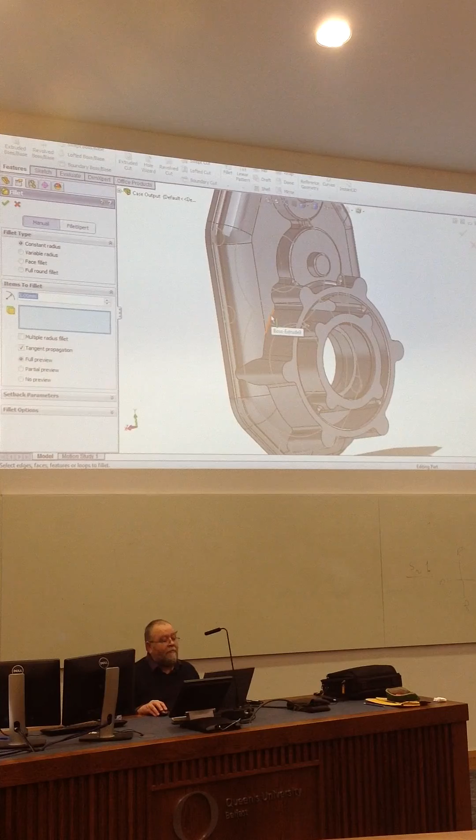Right. Okay, constant radius fillet, and I'm going to select this point here, and you see what happens. If you've done everything right, that's what happens. You get a fillet that runs the whole way around everywhere. And I don't know, as I say, I just think that's great. We can also put fillets into here. So

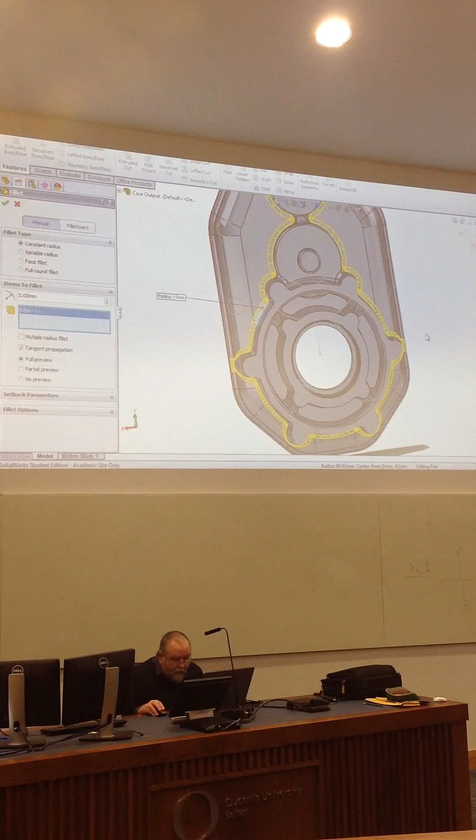Now I wasn't sure whether this was going to go in here or not. If it hadn't, I would have had to put in a face fillet first. So yours may be different. Okay. See all that nicely blended in there. It's just occurred to me I've missed off a couple of other fillets. Let me edit that to add those in. Doesn't have to be, but I'm just going to do that anyway. These 2 bosses,